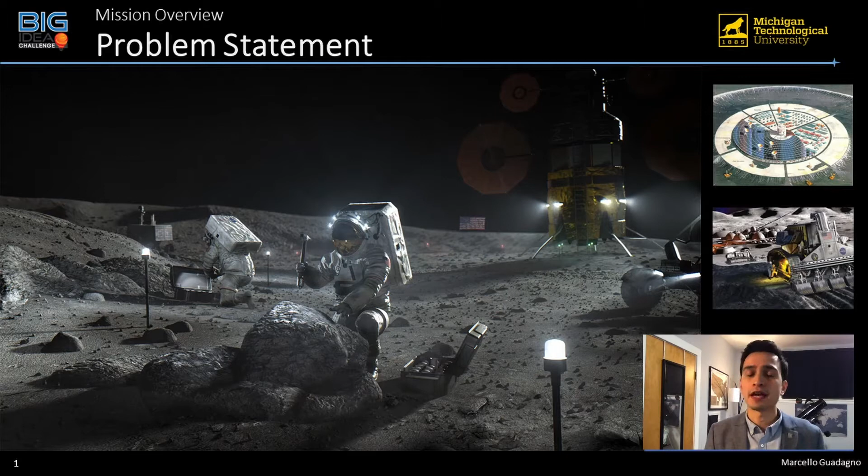The Artemis mission aims to get the first woman and next man back to the lunar surface in a sustainable manner. Part of these missions include the extraction of water ice from the lunar PSR regions. Though to operate and extract significant quantities of water ice in these regions means we'll have to operate in extreme environments for extended amounts of time. This means limited power generation and sometimes not having access to line-of-sight communications, meaning an intermediary step to relay power and data to missions within the PSR is required.

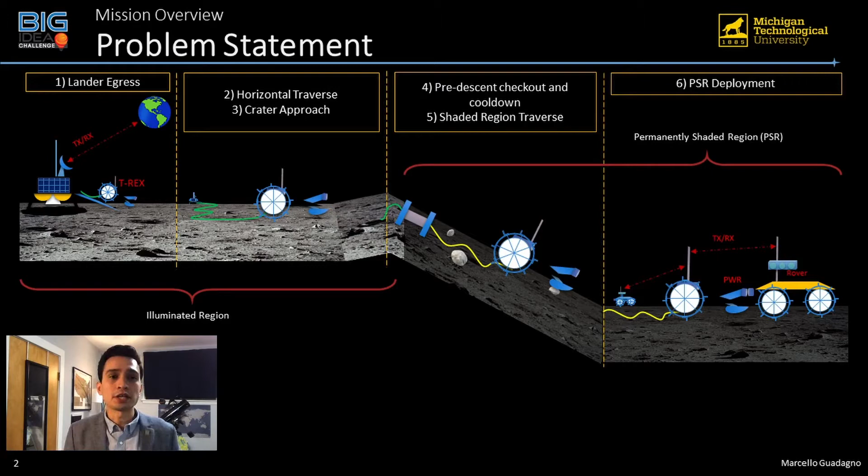Power and communications requirements make small missions difficult to do due to limited capability. So to maximize science potential and operational capability of long-duration PSR missions, precursor communications and power architecture must be established beforehand. Further, during manned operations on the moon, a resilient communication architecture will help ensure the safety of astronauts.

To solve this problem, we propose the Tethered Permanently Shadowed Region Explorer, or T-REX for short. T-REX is an infrastructure technology demonstrator mission whose goal is to provide reliable power and communication to other operations within the PSRs of the moon, where conventional line-of-sight communication and solar power generation is limited. This then decomposes into two mission objectives for us.

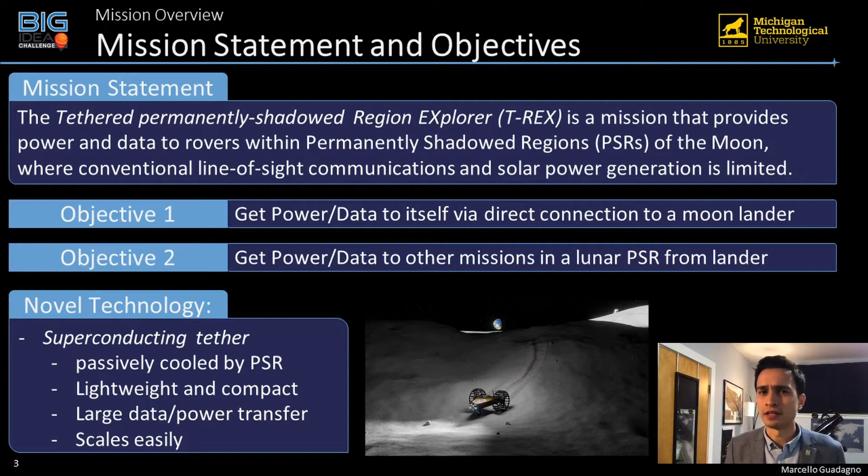First, our mission should be able to power itself while in the PSR from the CLPS lander that it is deployed from. Secondly, it should be able to give power and data to other missions operating within its local PSR vicinity. The concept of operations for a T-REX mission is as follows.

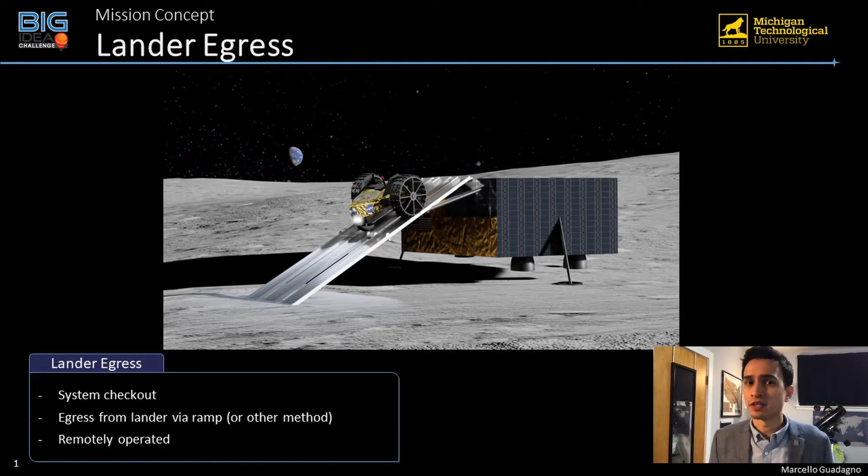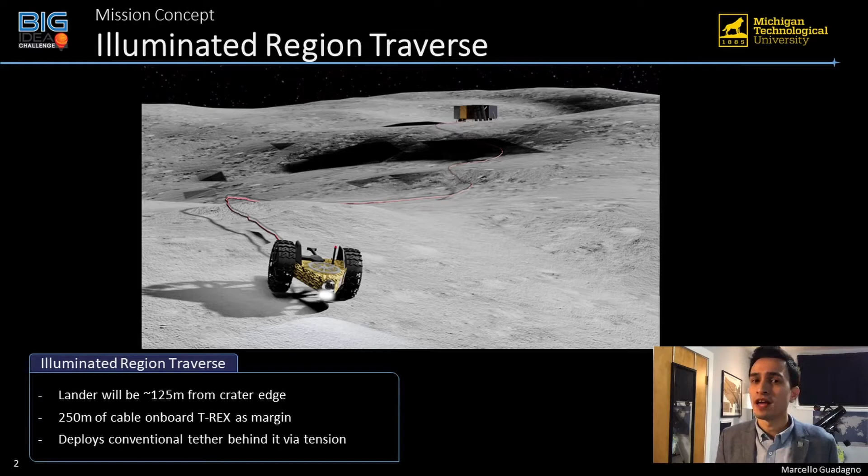After touchdown, T-REX will perform a systems checkout and egress from the CLPS lander via a ramp or similar method. During this egress, the rover starts to deploy its conventional tether behind it, and the rover is remotely operated via commands issued from an Earth-based ground station and sent to the CLPS lander via the Deep Space Network.

Next, the T-REX will traverse from the lander towards the rim of a PSR. According to this competition, we have a nominal 125-meter distance from the PSR crater, and 250 meters of conventional connecting tether is allocated for the T-REX rover to account for deviations from the direct path to the rim.

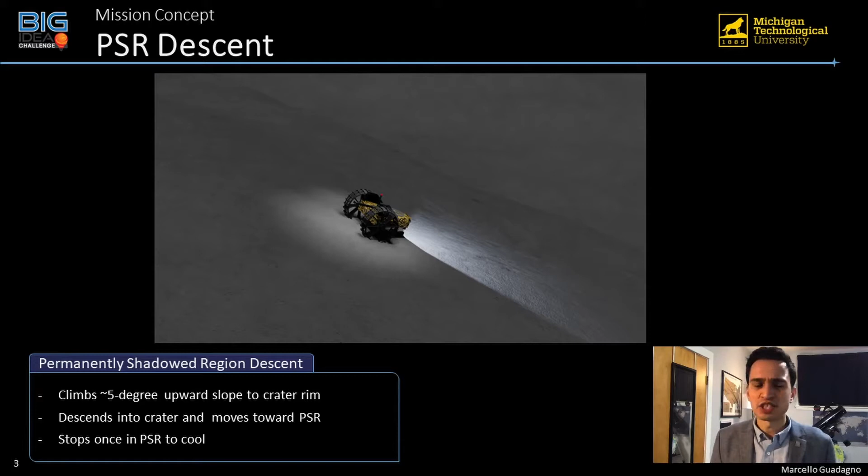From this point forward, the T-REX will start to ascend over the rim of the PSR crater and begin descent. Upon reaching a sufficiently shaded region, the rover will stop its movement until the primary spool has reached a cryogenic temperature that will allow power transfer by the superconducting tether.

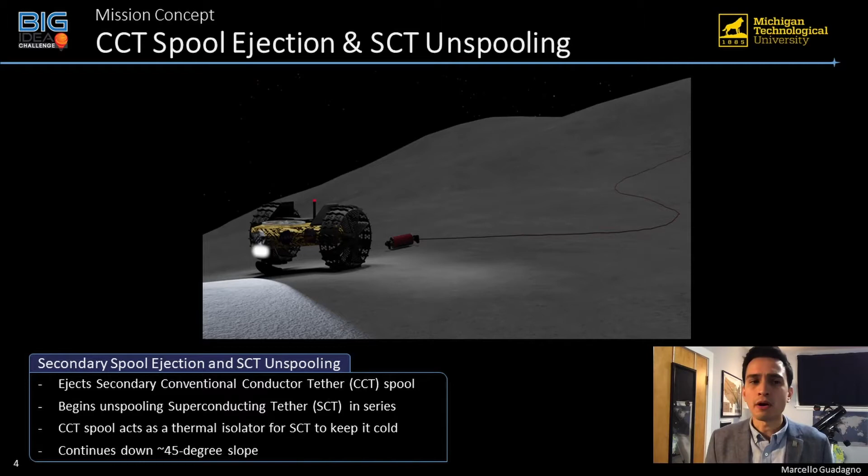The T-REX rover will start to deploy this tether at this point. The primary spool holds a 2-kilometer-long multi-channel superconductor, or SCT for short, and after traversing down up to the 45-degree downslope, the rover will then park at a relatively flat region at the PSR basin.

T-REX will remain in the PSR, acting as a power and comm hub for other missions within the PSR. A coupling interface then provides power to any rover which docks within the T-REX rover itself. After recharging is complete, the client rovers can then detach and continue on with their missions.

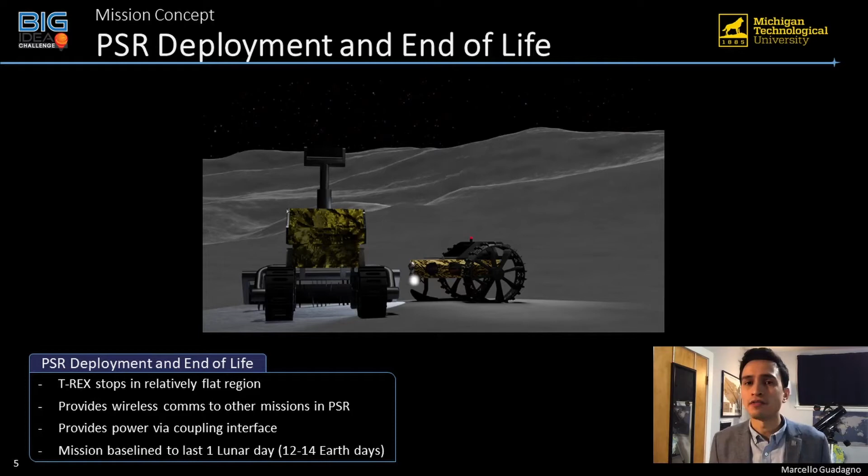Communications between the PSR and the T-REX and client missions are performed using a full duplex RF communication system. Two-way communications is then established from Earth to the client mission via our mission. This demo mission is expected to last one lunar cycle, or 12 to 14 Earth days, but can last longer depending on if the CLPS lander is able to survive the lunar night.

We followed the systems engineering process when developing our framework and mission architecture. Our mission was decomposed into requirements separated by subsystems and recorded within the Requirement Verification Matrix, or RVM. The RVM is written from the point of view of a flight mission, and requirements in this RVM have two verification gate stages, green and yellow, for flight and engineering models requirement verification respectively. This gives us the granularity to show real progress towards engineering models developed for BIG while keeping T-REX in the context of an actual flight mission.

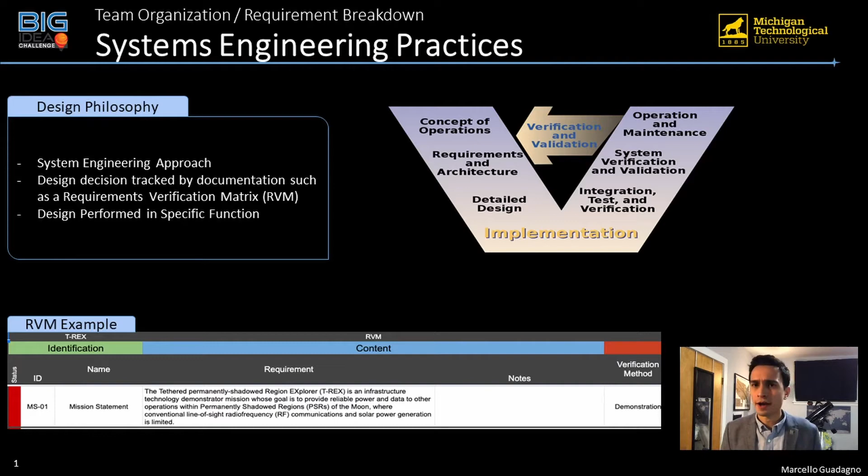Our team structure is then organized per subsystem. People in each subteam are responsible for verifying and documenting their own requirements and come together during system integration.

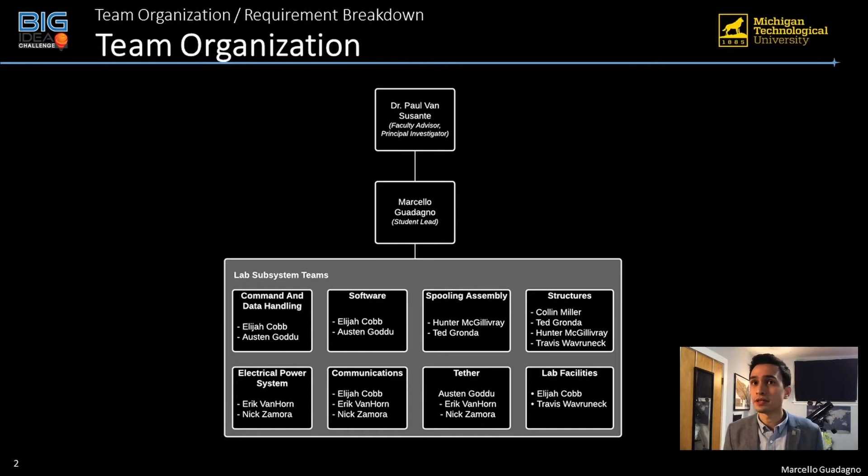Our team used many different facilities to develop a prototype version of T-Rex. Two key facilities in our lab are the Simulant Sandbox and the Dusty Thermal Vacuum Chamber.

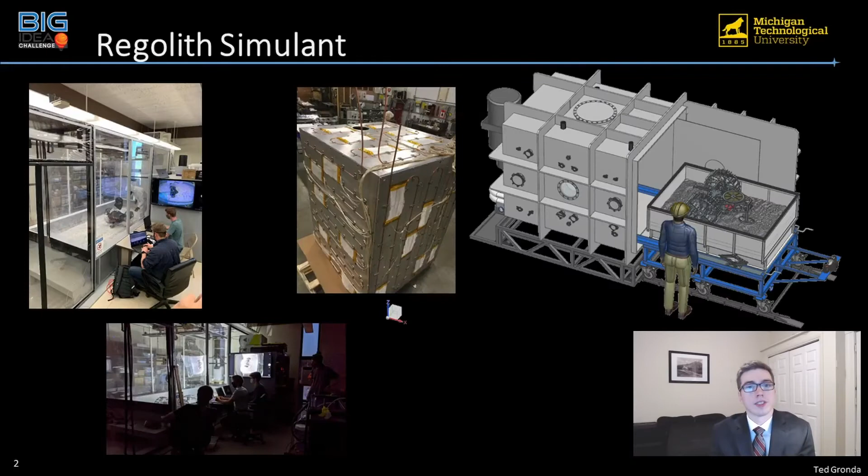The Simulant Sandbox with gravity offloading capability was created in the PSTDL, and 5,000 kilograms of simulant was manufactured at Michigan Tech. Simulant was made by crushing glassy black scoria from a New Mexico quarry and mixing it in an optimal ratio with pre-crushed anorthite from a quarry in Greenland.

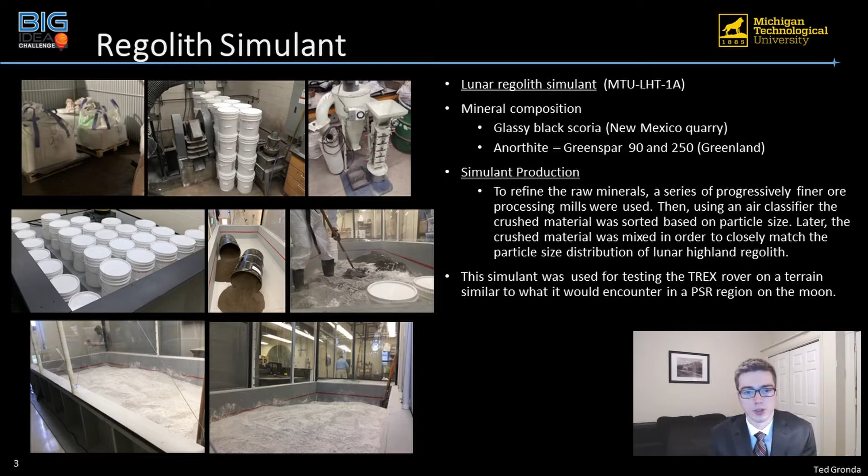This resulted in an accurate lunar Highland mechanical simulant with a reasonable mineral composition. The lunar simulant has very fine sharp particles and a tiny fraction of respirable silica, requiring the use of HEPA filters in the negative pressure enclosure, as well as PPE with N95 filters and respirators.

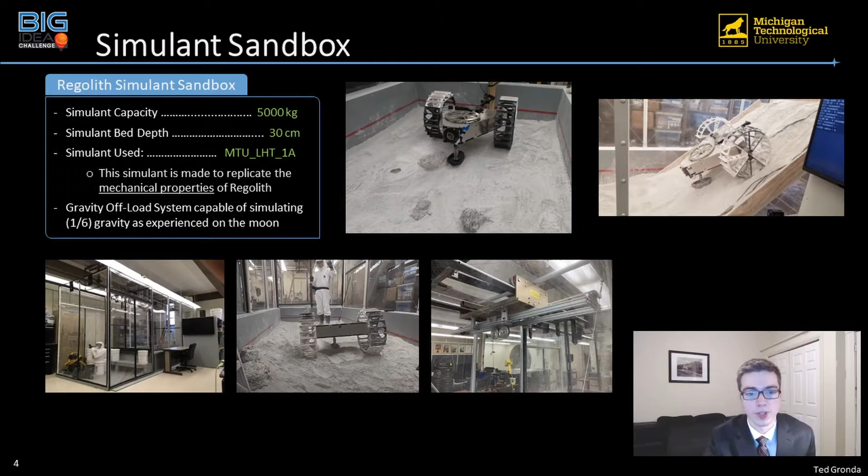The simulant was placed in the sandbox and lunar analog terrain was created with rocks and craters, as well as a 45-degree slope. The Dusty Thermal Vacuum Chamber, or DTVAC, is connected to a liquid nitrogen tank that cools an internal thermal plate and shroud.

It cools down to minus 196 degrees Celsius and can also be heated to as high as 200 degrees Celsius. A roughing pump and turbo pump are connected to the DTVAC via an industrial air filter and can achieve 10 to the minus 6 torr when empty and 10 to the minus 4 torr with lunar simulant and ice present.

This facility lets us conduct tests of robotic systems in a simulated lunar PSR environment, accounting for temperature, pressure, and regolith. The DTVAC facility at Michigan Tech is planned to be operational by the end of January 2021. It will be used to conduct tests of the Mark III T-Rex prototype once commissioning is complete.

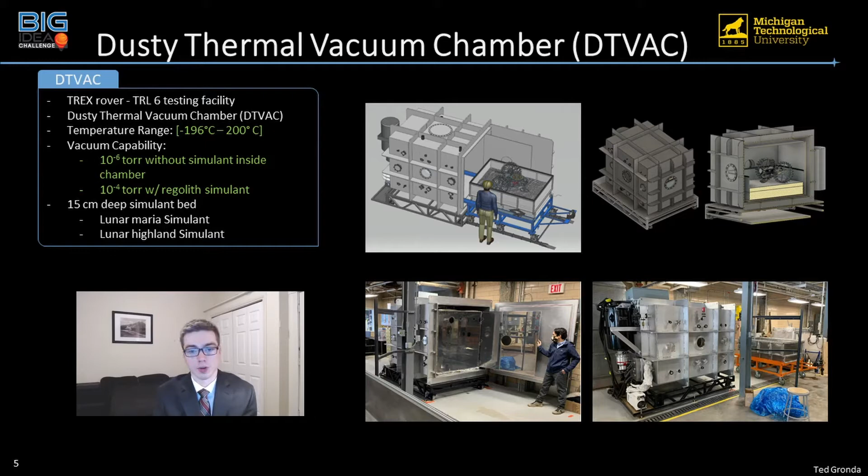The T-Rex rover is composed of the following major components: a conventional conducting tether, used for a power and data link while traversing outside of the PSR; a conventional conducting tether spool, used to unspool our initial tether via tension, and to eventually act as a thermal break between the tether in the illuminated lunar region and the superconducting tether in the PSR.

A superconducting tether, used for a power and data link once we were within the PSR. A tension measuring system, used to measure the tension in the superconducting tether to provide information to the unspooling system. A passive hot dock power coupling, used to provide power to compatible rovers with the appropriate active end.

A front-mounted sled in order to control our descent down steep crater edges. The rover chassis, containing the electronic stack, motors, heaters, and insulation to keep everything shielded and sufficiently warm during the traverse in the PSR.

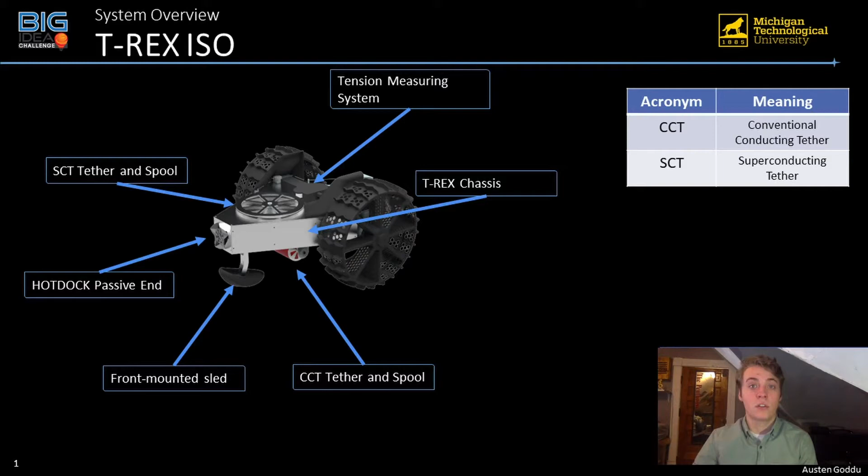Within the rover, there are brushless electric motors which drive the wheels, the previously mentioned electronic stack, containing components such as onboard computers, power distribution boards, internal sensors, and wire harnessing, and the spooling motor for the superconducting tether, which actively

unspools the tether at a rate determined by the tension measurement system in order to keep a safe tension in our tether. A slip ring between the power system and both tethers, allowing us to avoid running power through our superconducting tether before it has been able to cool down to its appropriate operating temperature.

And finally, decoupling motors, used to drop the conventional conducting spool and release the slip ring. This runs power through both tethers to the power system when the superconducting tether has reached the appropriate temperature.

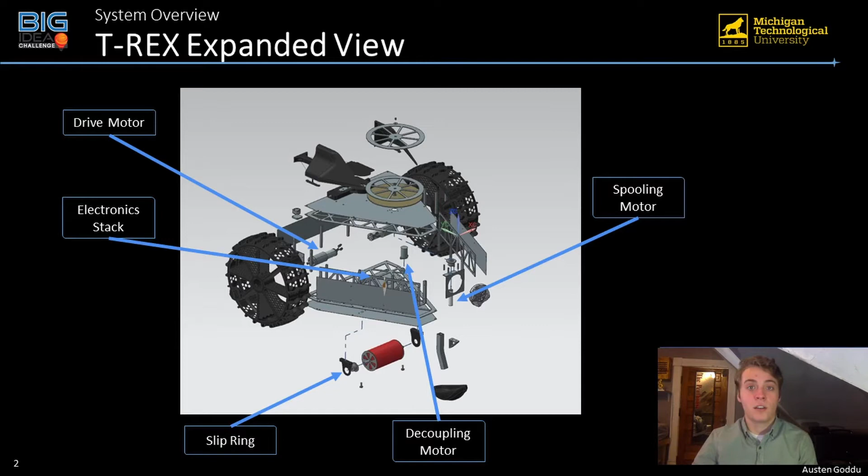All of the components in the T-Rex rover are grouped together by overall purpose into 7 different subsystems. Command and data handling, providing overall system control and data collection through its flight software.

Spooling, controlling the spooling operations of both the super and conventional conducting tethers. Communication, handling the connection between our system and other wirelessly connected rovers to the ground over our tether. Vision and mobility, providing the drive motor control and camera feeds.

Electrical power system, providing and regulating power to all onboard electronics. Tether, the operation of both of our tethers to provide a link to the connected lander. Lander, consisting of any hardware necessary onboard the connected lander. And finally, structures, consisting of the mechanical and structural backbone of the T-Rex rover.

The makeup and operations of each of these subsystems will be explained in the subsequent sections of this presentation.

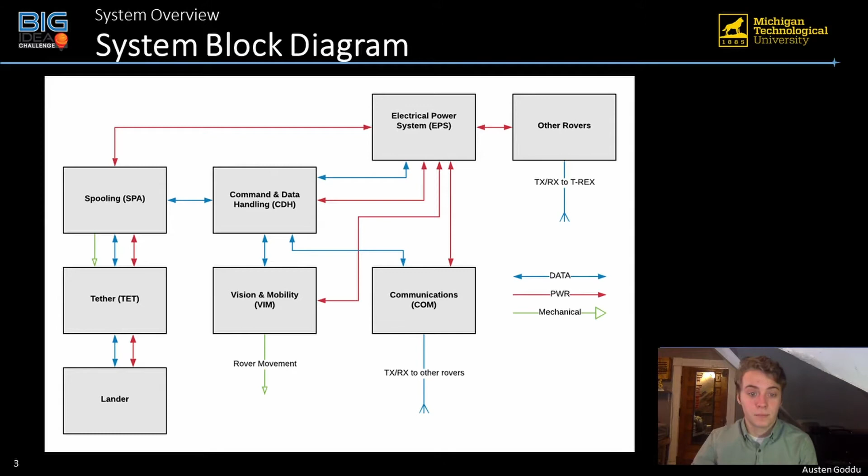One of the most unique features of our design is the use of a superconductor in our tether. The superconducting element is significantly lighter but more fragile than its conventional counterpart, and special considerations need to be made to ensure the superconductor stays within its proper operating conditions.

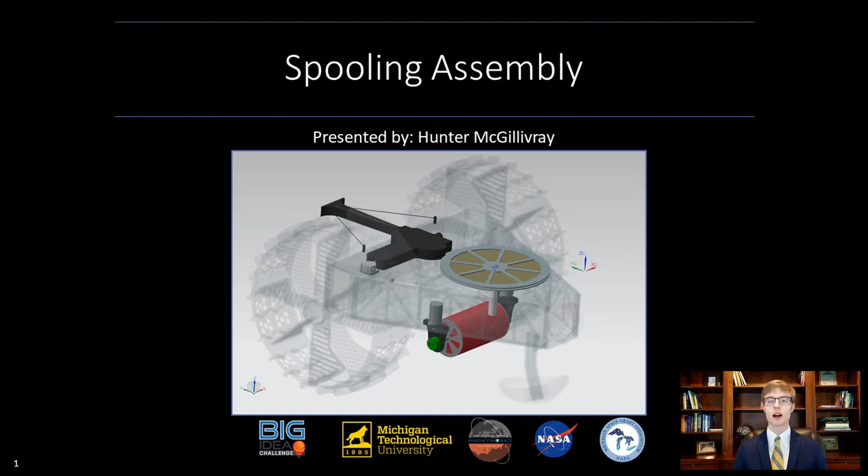These conditions are reflected in our RVM and include keeping the tether at its proper operating temperature of 92 Kelvin and below, keeping the tension in the cable less than 5 newtons, and making sure the tether does not exceed its minimum bend radius of 1 centimeter. The spooling assembly, or SPA, within the rover ensures these requirements are met.

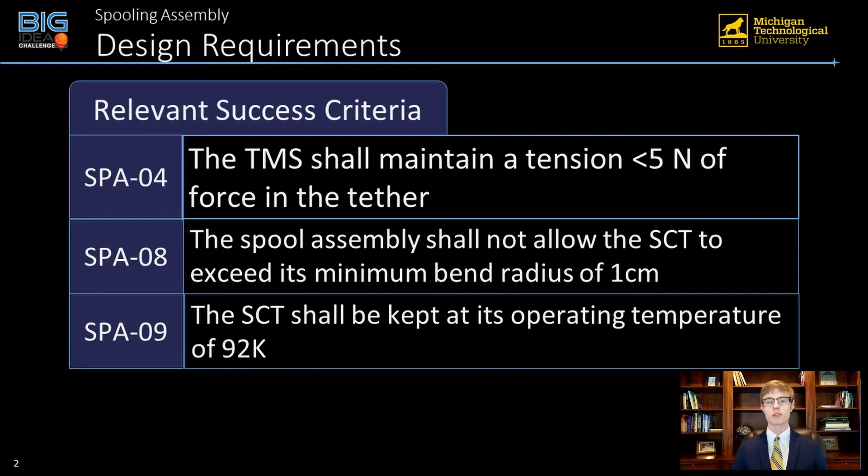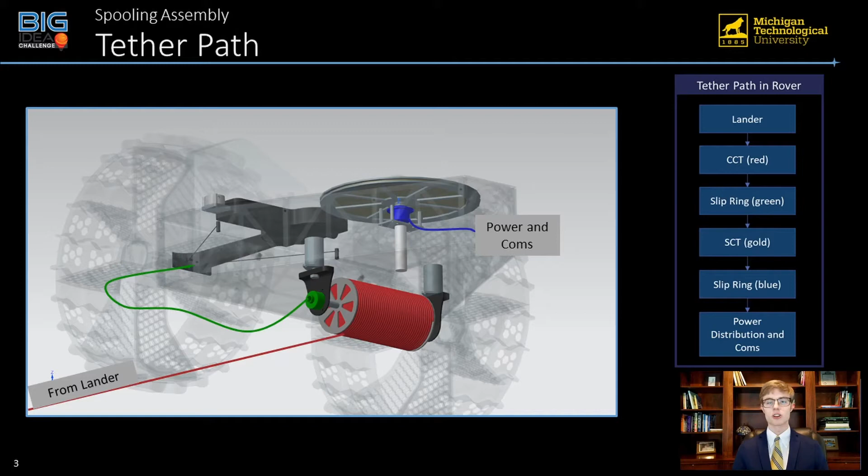The first 250 meters of the tether is made of a conventional copper conductor. This is done to span the gap between the lander and the crater, an area that experiences temperatures higher than the 92 Kelvin operating temperature of the superconductor. The CCT spool acts as a method of deploying the conventional conducting tether and a heat break between the sections of the tethers once deployed.

The SCT spool is driven by a motor coupled to its shaft. This motor can reel in or release the superconducting tether based on the position of the central pulley in the TMS.

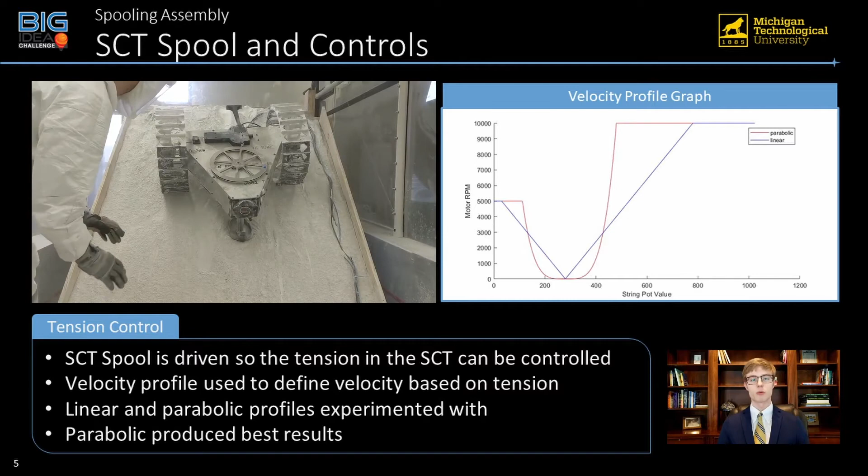Of the two velocity profiles that we experimented with, we found that a parabolic profile worked well to reduce noise near the tension set point and was still able to quickly respond to fast accelerations.

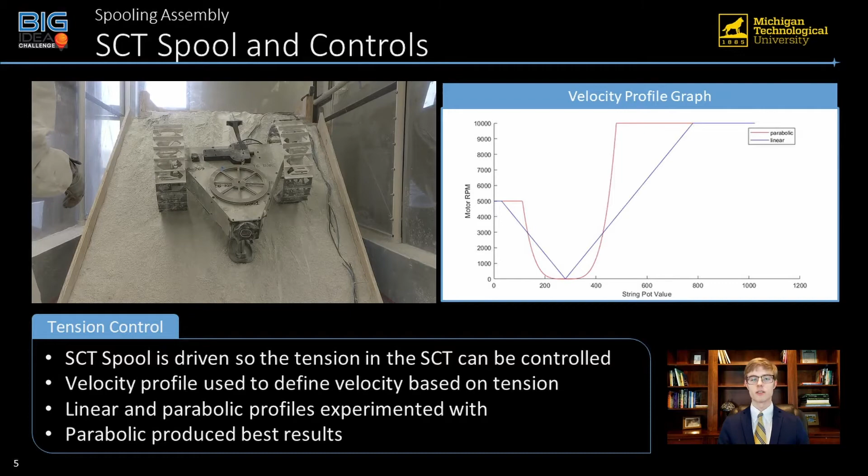The video playing now shows a portion of our slope testing and the TMS managing the tension in the tether. Note how when the rover slips on loose regolith, the spool quickly releases the extra tension generated from the fast acceleration. Two types of tests were conducted with the SPA inside the sandbox.

The first being a flat ground test, which was used to get data on obstacle traversal and TMS accuracy. Once the accuracy met mission objectives, we moved on to slope testing, where we proved that the system can continue to perform on a 45-degree downhill slope.

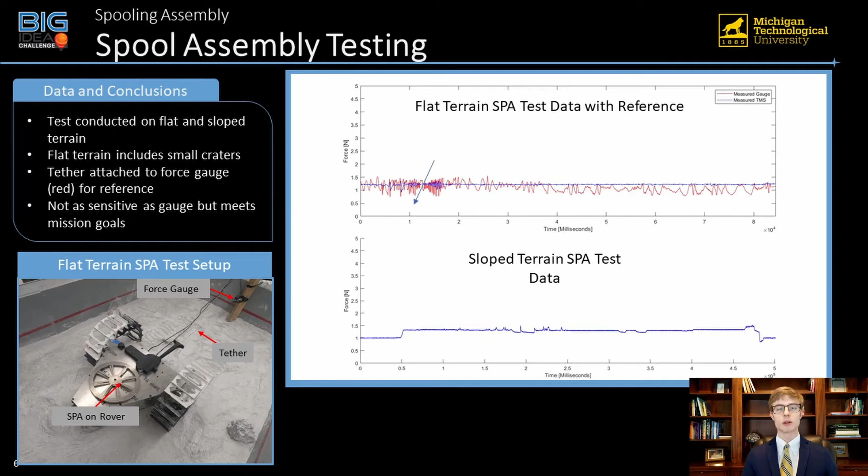The two charts on the right show the tension measured by the TMS and a force gauge as a reference. As you can see, the TMS was able to keep the tension well below the 5 Newton maximum and was accurate within half a Newton.

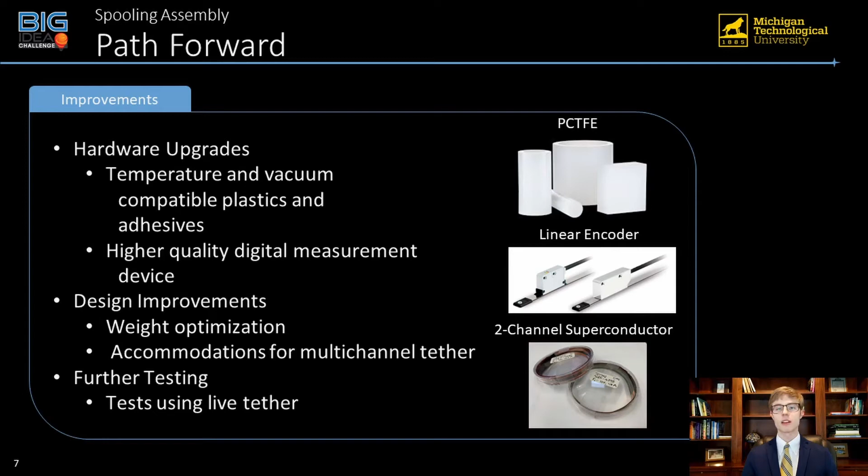Moving forward, our main objective is to conduct more realistic tests using a live tether in lunar conditions. To get there, a number of design and hardware improvements need to be made, including using cryogenic and vacuum-grade components, as well as making a few modifications to the SCT spool and TMS pulleys to accommodate the wider multi-channel superconductor.

Once entering the PSR, the T-Rex begins its pre-descent cool-down phase, where we wait for the superconducting tether to cool to 92 Kelvin, also referred to as its superconducting state. During this period, the conventional tether spool acts as a thermal buffer between the end of the conventional conductor and the beginning of the superconductor.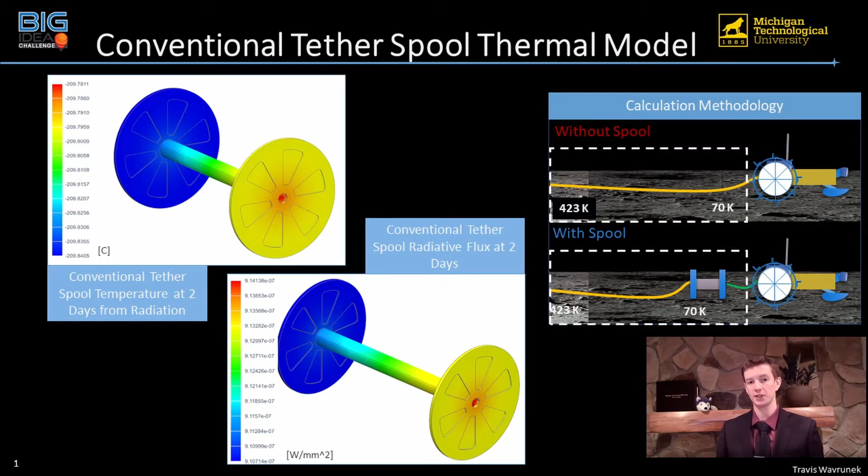Through simulation, it was determined that using the spool as a radiative heat sink and thermal break increases heat dissipation of the tether, reducing how far into the PSR we need to travel before beginning the cool-down phase. Future testing will take place in our DTVAC to validate the effectiveness of this configuration.

The other main source of heating that the superconducting tether will experience comes from within the rover. The motor driving the superconducting spool is the main source of this heating, as the motor shaft provides a direct path for conduction between the electronics we want to keep warm and the tether.

To simulate this, a model was made to analyze how quickly radiative cooling could bring the superconducting spool to 92 Kelvin with the heat load acting as the motor.

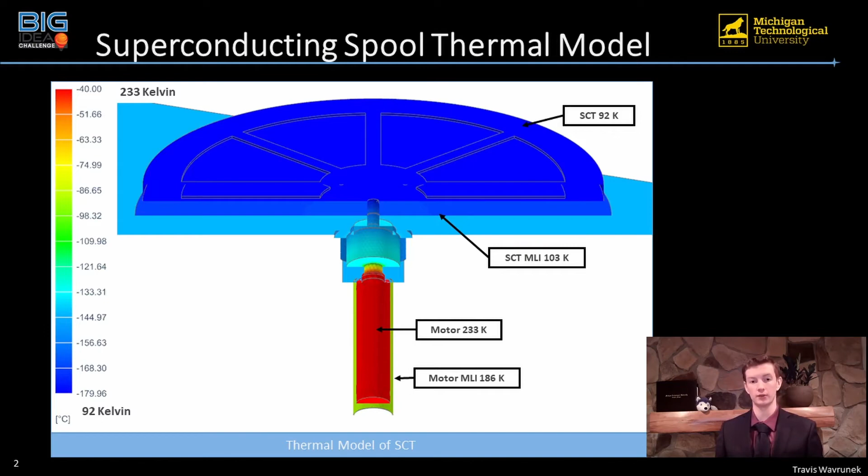By using a fiberglass composite for the motor shaft, MLI blankets, and anodized aluminum for the spool, the tether is projected to reach its superconducting temperature after 2 days. Verification testing in the DTVAC will be used to test the validity of this model.

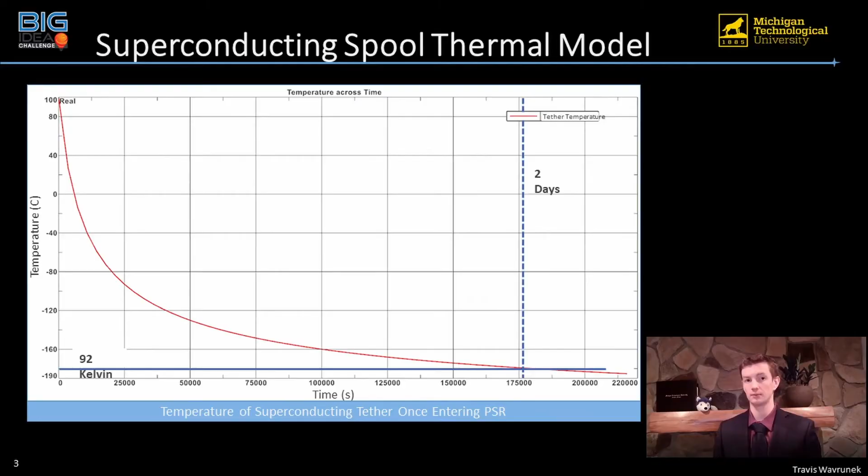The COM subsystem serves to provide data transfer between nodes in its wireless local area network, including internal rover and external client communications. The tether deployed by T-Rex provides the medium for lander-rover data transfer, which consists of 250 meters of conventional conducting Cat5 twisted pair, followed by 2 kilometers of superconducting YBCO cable.

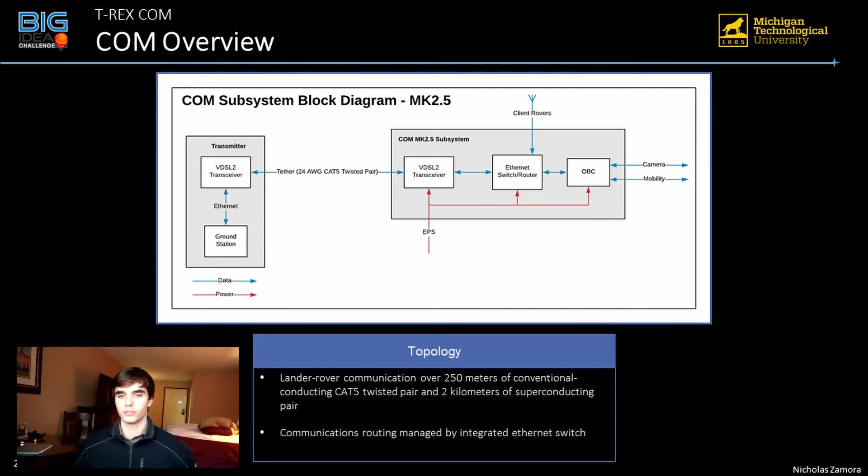Driving the subsystem are an integrated Ethernet switch, the main onboard computer, and any active ground control software instances.

The T-Rex COM subsystem utilizes the WebSocket network protocol to communicate with external nodes. This protocol was selected as it provides a useful abstraction over base TCP sockets, including features like automatic message framing, heartbeats, and more. This protocol allowed the T-Rex team to accelerate the development of the COM subsystem by relying heavily on its feature set.

The VDSL2 standard was chosen as a modulation scheme for communication over the tether. VDSL2 provides full duplex communication, low latency, and adaptability to various RF noise environments.

The implementation of this modulation scheme provides data rates above that of the Deep Space Network. Earth to T-Rex communication speed will therefore not be limited by T-Rex hardware, and this technology can scale easily to meet growing data transfer needs on the Moon.

The focus of comm testing has thus far been centered around tether functionality, in which several key requirements have been verified. A test of the communication functionality of the conventional conducting tether revealed that it was possible to transmit images with an average size of 200 kilobytes via VDSL2 over 305 meters of Cat5 twisted pair. When implemented on the T-Rex rover, the conventional conducting tether is able to reliably handle data transfer, including video streaming at 720p resolution at 30 frames per second.

Subsequent tests of parallel one-channel sections of superconducting tether were then performed. While submerged in a liquid nitrogen bath, a length of approximately 0.3 meters of superconducting tether had the ability to maintain a VDSL2 link, performing several ping tests with no packet loss, and eventually allowing for video streaming at approximately 30 frames per second and 720p resolution.

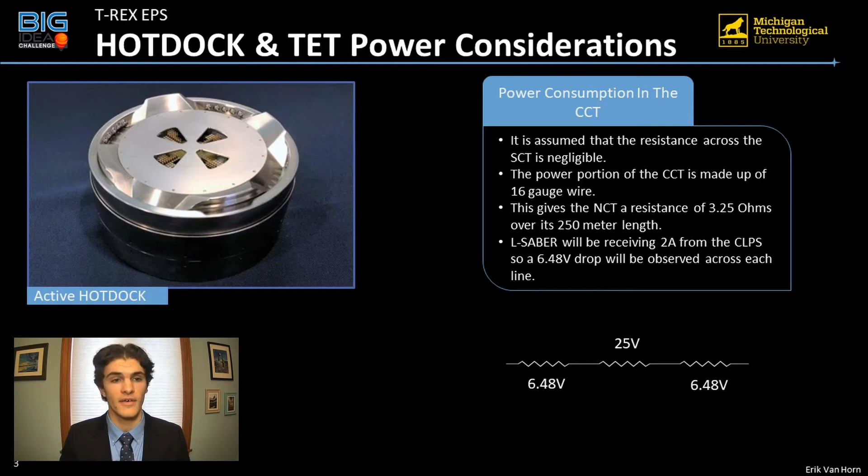The power budget for this mission is divided up into 3 modes of operation: moving, cooling, and parked within the PSR. Using data drawn from each component's datasheet, an estimate of the average and peak power for each mode can be determined. The rover will draw on average 40.5 watts during Mode 1, 23.3 watts during Mode 2, and 19.5 watts during Mode 3. Note that these values are significantly higher than what was originally requested, but are in the operational range of the CLPS lander.

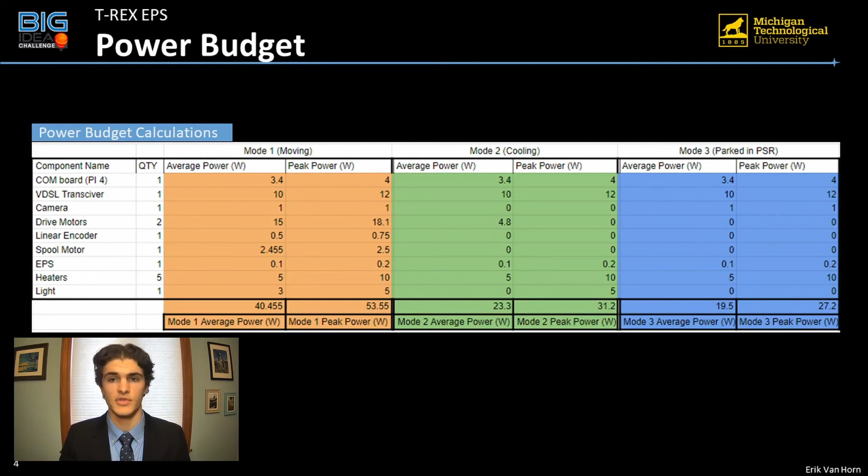Further testing and design iterations will focus more on the efficiency and DTVAC readiness of the hardware.

Our team conducted mobility tests inside of the sandbox to evaluate how accurate our power budget estimates were. We recorded a power draw of 33.6 watts in Mode 1, 18.1 watts in Mode 2, and 14.4 watts in Mode 3. During these tests, heaters and lights were not used. If heaters and lights had been used in the tests that required them, then the additional amount of power T-Rex would draw is very close to the power budget estimates.

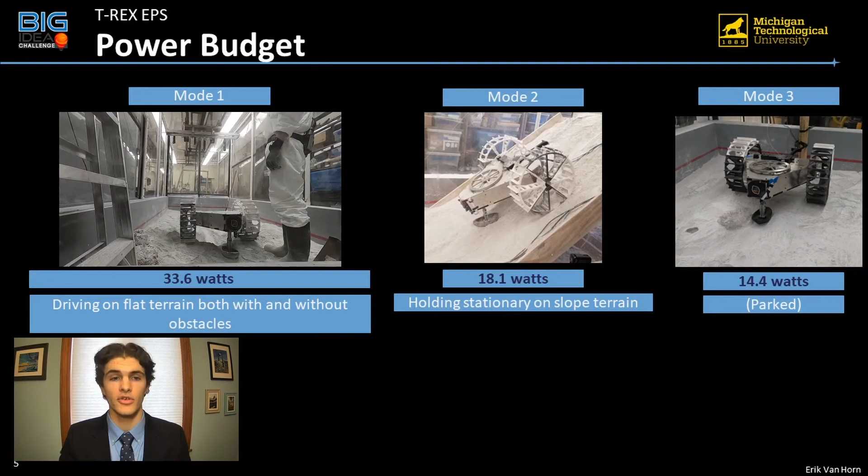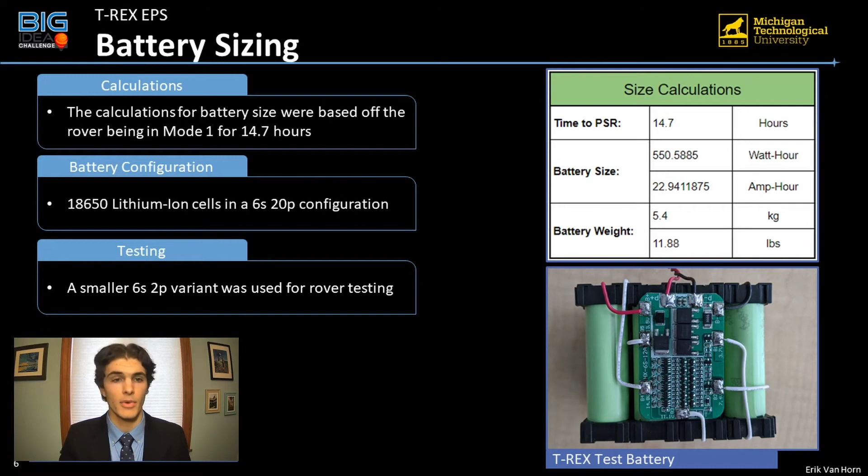The T-Rex will traverse from the CLPS lander to just inside of the PSR, where it will wait for the SCT to cool below 92 K. During this traverse, the rover will operate solely off of battery power, for a worst-case scenario where the CLPS lander cannot provide enough continuous power. Note that larger CLPS landers can supply much more power, which would allow for a much smaller battery.

Since the conductivity of lunar regolith is extremely low, we do not need to worry about the exposed copper plating of the SCT shorting. Due to their topography, the PSRs will possess a large negative charge due to the deflection and absorption of solar wind plasma. Further testing is needed to determine the effect of how these electrostatic potentials will affect the SCT, as well as the rover electronics. In addition to charges built up by solar winds, objects moving through lunar regolith will accumulate a charge due to the triboelectric effect. This will also require future testing to ensure the rover's electronics are not damaged.

EPS has been tested continuously throughout the development of the rover, at each stage measuring the output of the voltage converters, as well as testing the current sensors to ensure they are correctly calibrated.

The firmware has gone through several iterations, and each time we tested that it successfully integrates with the OBC and CDH. Moving forward, the focus of EPS will be to improve the efficiency of the system and ensure it will survive the environmental conditions of the DTVAC for future testing. Testing will be done with the SCT and rover electronics to help mitigate the effects of the electrostatically charged regolith.

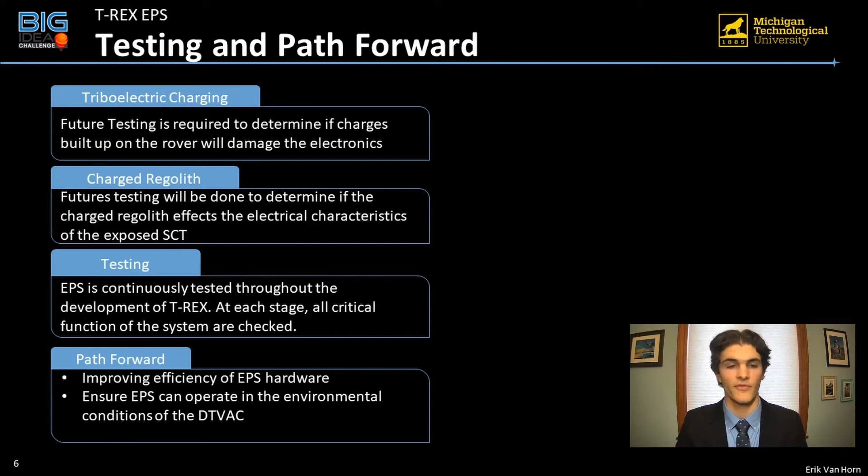and the triboelectric effect. T-Rex will be remotely controlled and will require a vision and lighting system. Our prototype version of this system uses a 5 megapixel camera and a 3-watt LED. To test the effectiveness of this system, our team conducted mobility tests in the Simulant Sandbox in both light and dark conditions. Results from these tests showed that the system was effective for distances up to 2.4 meters away

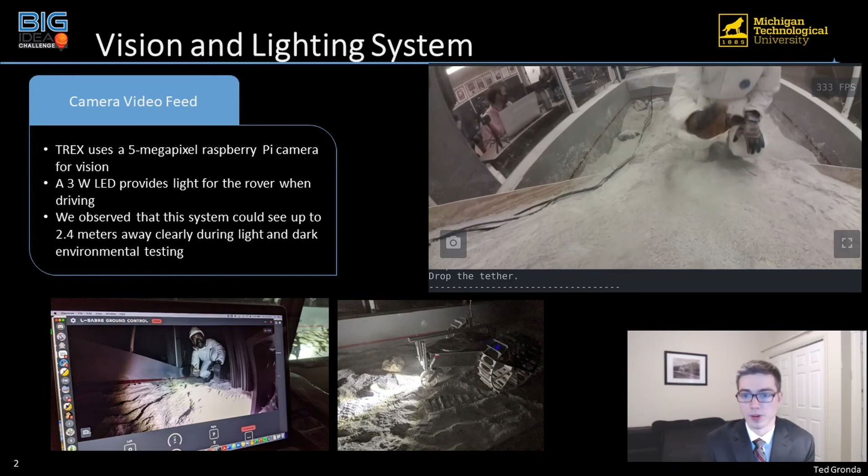and that a rover operator could navigate using only the camera video feed. The path forward for a flight-ready version of this subsystem will involve slight modifications to the hardware design and selecting an upgraded light and camera that can be used inside the Dusty Thermal Vacuum Chamber.

T-Rex's mobility system uses brushless DC motors with gearboxes. The motors were sized based on results obtained from a force balance study that looked at 4 driving scenarios. From these calculations, we determined motors with an output of 2.5 Newton meters would work for the prototype T-Rex.

However, when we tested these motors on the rover, we soon realized they were undersized. Every time we attempted to drive over a rock, the motors would trip on an overcurrent protection fault. To solve this problem, we reevaluated our calculations and added a larger factor of safety for torque.

The second set of motors we purchased were larger at 30 Newton meters each, and this proved to be more than enough power for our tests. After installing the new motors, we experienced 0 issues from that point on with mobility testing.

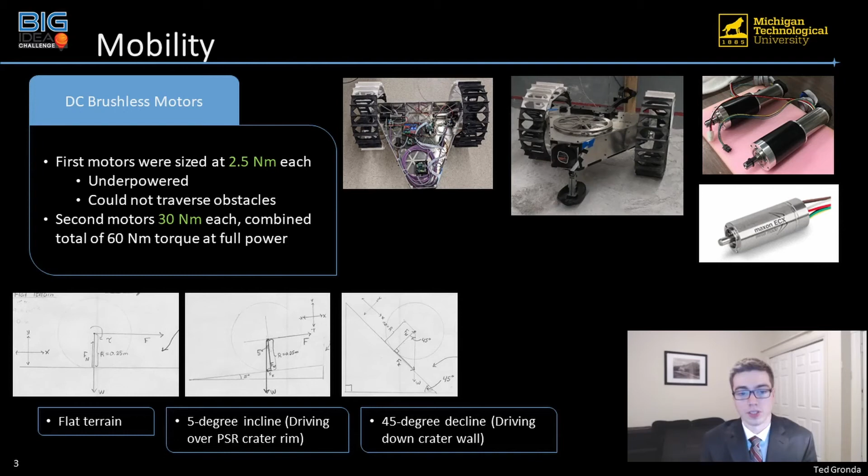Currently, the motors installed on T-Rex are not space rated. The path forward for a flight-ready version of this subsystem will involve selecting motors of similar power but that are space rated and can be used inside the DTVAC.

The software developed for the T-Rex has been designed for portability from one hardware prototype to the next and into a flight model. The control software has been written from the ground up specifically for the T-Rex. The primary goal of our ground control software was to provide a single access point to view telemetry and provide system control while keeping in mind the latencies of the deep space network.

By embracing web technologies that have flight heritage in our software, we were able to accelerate our development pipeline. While providing all necessary functions, we were able to keep our ground control software light and manageable at just around 3,000 lines of code. Using these technologies, we gained the ability to control the T-Rex from any computer with an

active network connection. We found it extremely beneficial to develop certain subsystems on board the T-Rex with these technologies in mind. As both sides of our software were written in the same programming language with the same feature set, we were able to work on various parts of the T-Rex in parallel.

Employing a very popular networking protocol found in web technologies, we gained many useful features and could abstract away many complexities of network communication to focus on the development of the T-Rex. We are satisfied with the choices we have made in regards to software design on the T-Rex. Commands passed throughout subsystems operate with the speed and reliability we designed for.

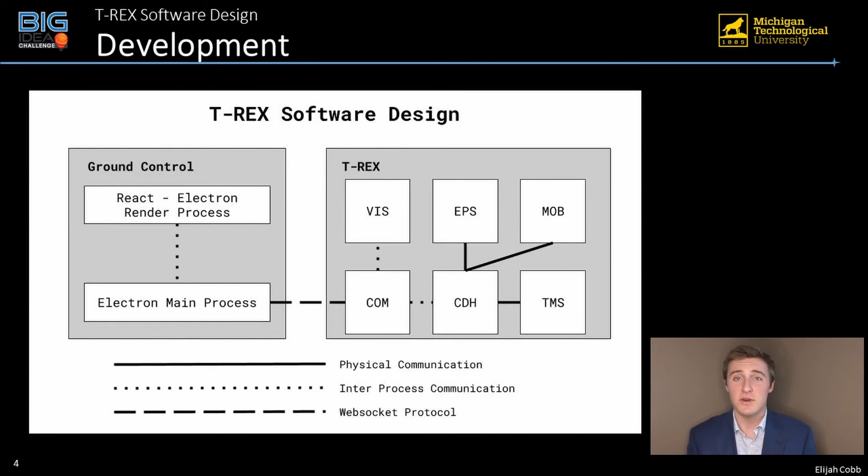As we look towards a flight model for the T-Rex, we plan to change a few items. Moving forward, we plan to integrate high-resolution camera streaming into the T-Rex with multiple parallel camera feeds instead of our current single camera. Software on the T-Rex has been developed in a way to mitigate rewrites and redesigns as we move forward to a flight-ready model.

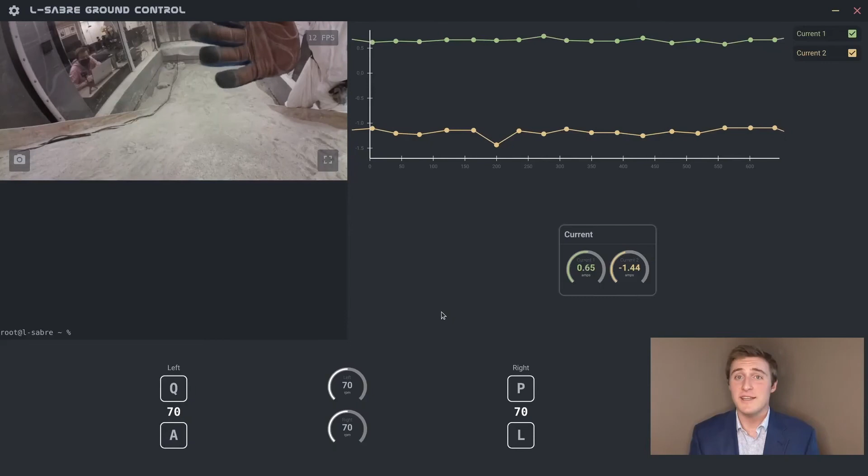Further improvements are planned in our software pipeline to integrate with the robot operating system and future graduate research at the PSTDL. With the addition and integration of autonomous gravity offloading developed by our team and provided by the PSTDL Sandbox, the T-Rex can be put through harsh mobility testing to simulate the worst environments possible on its mission into a permanently shaded crater.

The frame of the T-Rex is constructed out of aluminum, which consists of several components. The main structure consists of a top and bottom plate connected together with standoffs. Attached to the sides of the standoffs are side panels that add to the rigidity of the structure.

The frame panels use laminated isogrids to reduce weight while keeping dust out of the rover. Another dust preventative feature is the use of dust guards that prevent dust from falling off the wheels onto the top of the rover. Flight-ready versions of T-Rex would also use a variety of other features for EMI and EMC mitigation.

This includes installing multi-layer insulation for better thermal control. Additional refinement to the structure will be done based on the shock and vibe requirements levied by the launch provider.

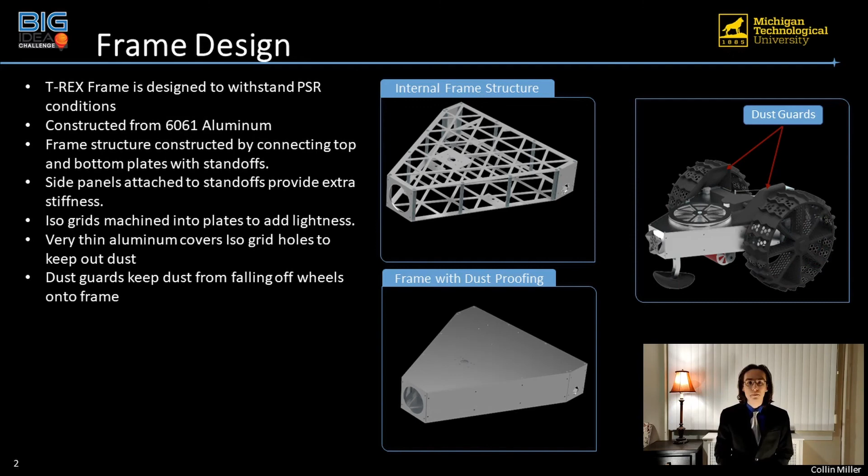The wheels of the T-Rex rover use grousers to provide adequate traction needed to control the rover while traversing PSRs. The wheels used on the most up-to-date prototype are fully 3D printed from PETG plastic. The use of 3D printing made manufacturing the wheels much easier and allowed for a much more complex design. The wheel design is not our primary focus and was designed out of necessity for functionality testing.